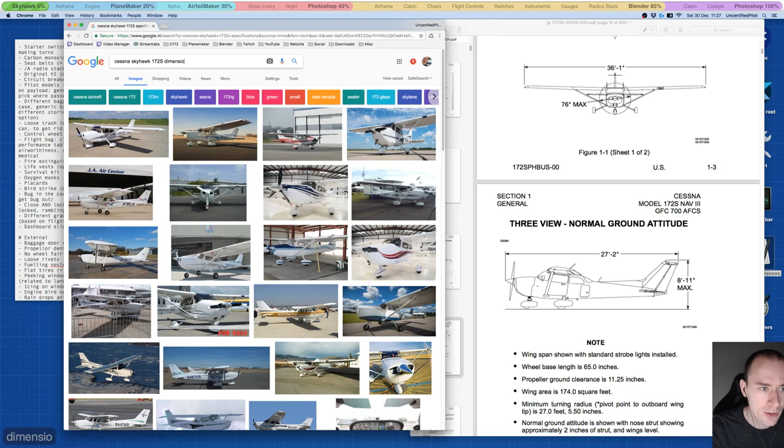For example, dimensions, right? Scale. If you look, can I zoom this stuff in? Now look at the front view here. Do you see what I'm referring to? If you look at the windshield here, this seems much more realistic to me and much taller than this.

Even though this is in the manual, and I need to be sure about the pictures and that they are to scale. So my first question would be, what picture is right? Should I use this one or that one? And I would expect that in the manual here that this would be correct, but it seems too cramped in my eye, and that's what triggered me to look for some additional specs.

Hey Lex, good to see you. Good morning.

So what do you guys think? What's the proper one?

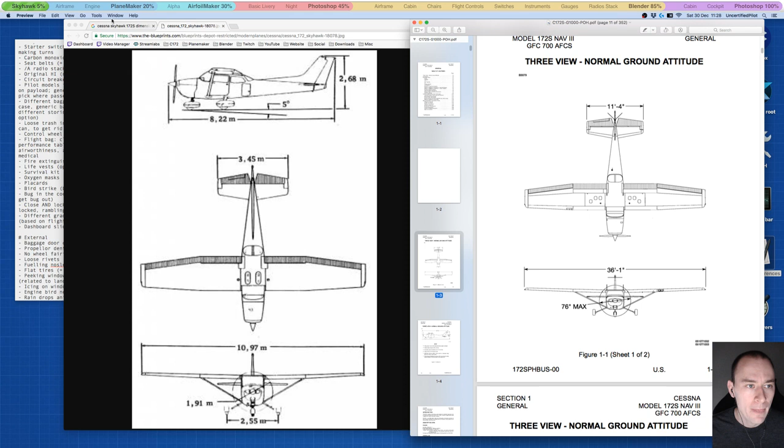Yeah, this is a better resolution. This is 782. Yeah, so let's save this one as well. We could work with this too. Desktop is fine.

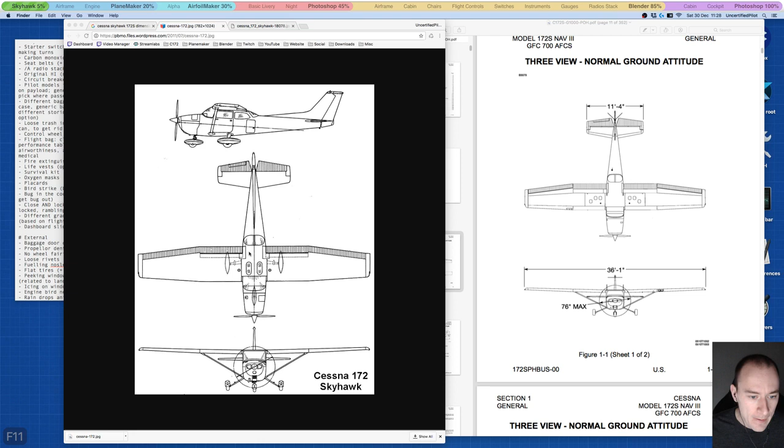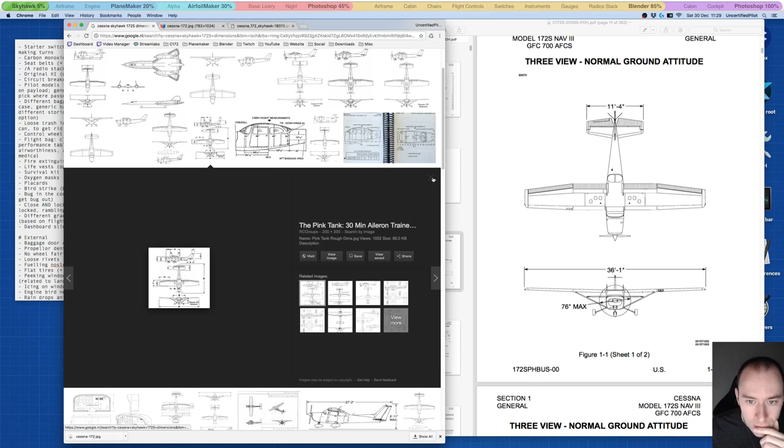References, references, thank you. Yeah, just a few more. I want to have big ones. Size large. No. Well, I already have one, I guess.

Valley, if you have an official manual, then I go for the specs on that. Yeah, I agree. But still, it looks weird. It looks too narrow, the windshield. But I would agree as well.

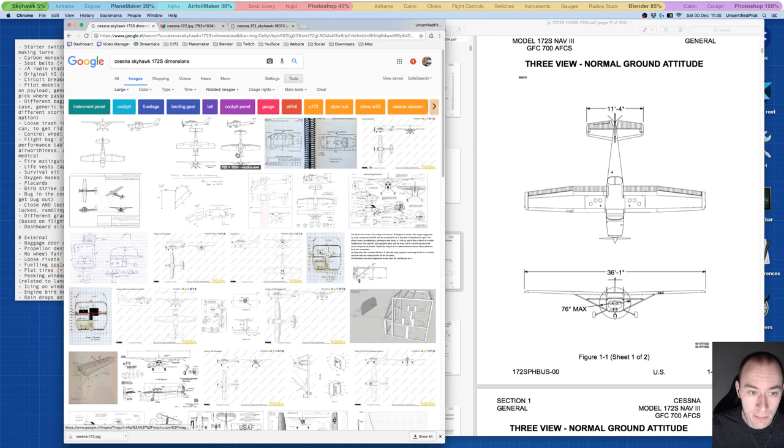This is the manual and this is the 172S. Perhaps that makes a difference, that the pictures we're looking at here is not the S version, but the R version or whatever version, and there's a significant difference in windshield. We should also look at, well, that's also a good one. Just some real world pictures of the 172S front view, and then we can compare.

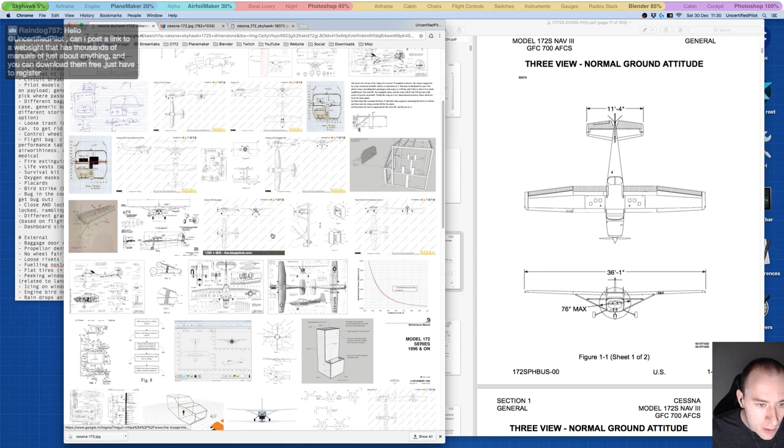Yeah, exactly. Just one more. If we can find one. I guess not.

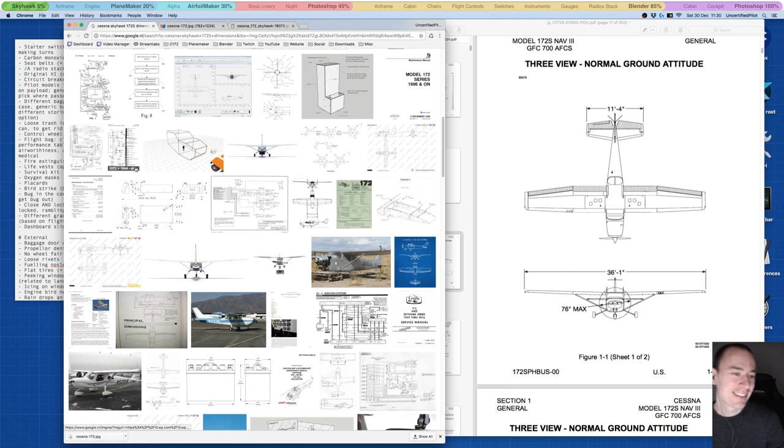These charts are so cool. Ooh. Ooh. That's nice, look at that. I'm gonna save this one. Yeah.

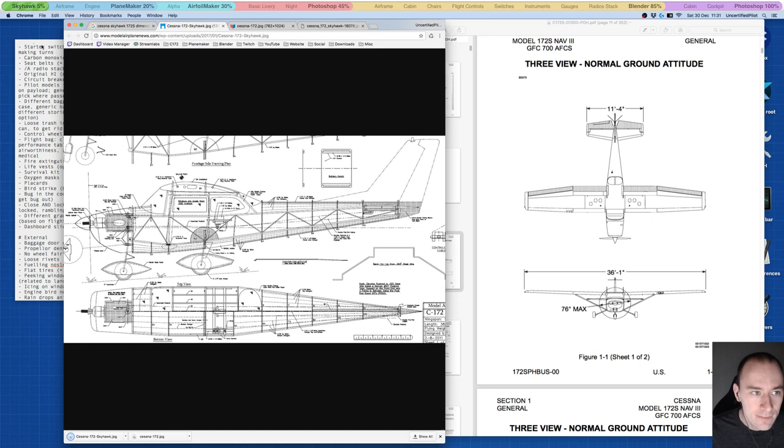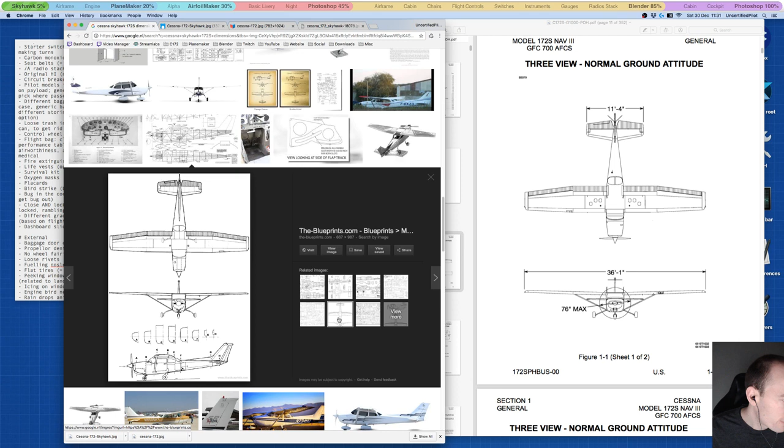Lex, if you Google blueprint, you get a lot of pictures that are the same as the manual one. Ah, good one, Lex, I will in just a sec. Thanks. Ooh, this is nice. Not the one that I was looking for, but it's nice. S version, I guess. I don't know, what's this? I'm gonna save it all, guys.

Also, in terms of the airfoil, although this one looks a little bit more dated, a dated model. But also with Airfoil Maker, we need to make sure that the airfoils are right, and perhaps we can use this one, but it seems very old. I'm still gonna save it.

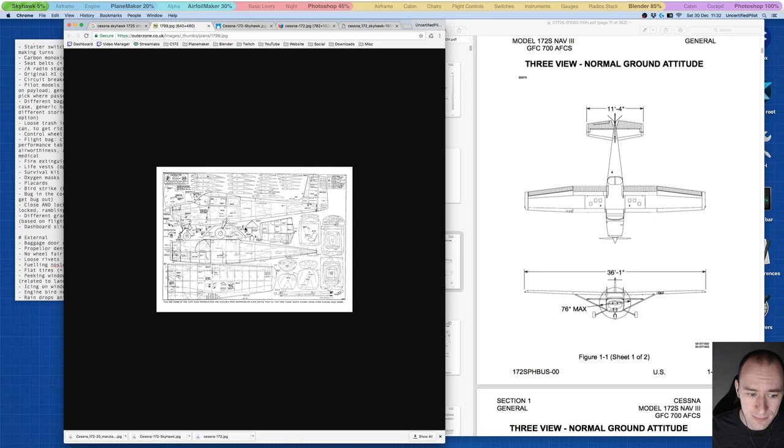Okay, let's follow up Lex's suggestion. Skyhawk S blueprints. Blueprints, yeah, so this is the one. Yeah, S. Well, this looks like the same shape as this one. And it reminds me... oh no, it's this one that I used for my wallpaper.

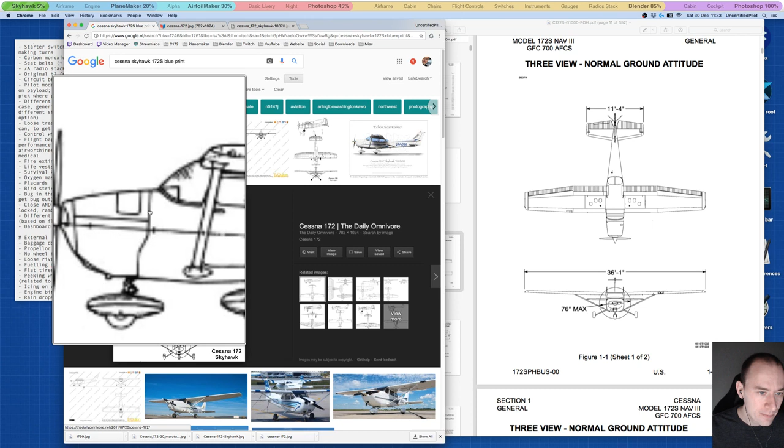Yeah, so here you can see the tall one. But if you look at it just logically, you see that this is the nose. Let me see, can I... You can see the windshield almost takes up a third of the height of, well, the top of your ceiling to the bottom of the engine, of the fuselage. A third or so. And if you look at this picture at the side, well, it does. It does, if you look at it sideways.

Well, if it's in gold, you must trust it, right? Same here.

Okay, so my feeling would be that this is correct. But another way by which we can confirm that, I guess, is just to look up a real Cessna Skyhawk 172S front view. A real front view.

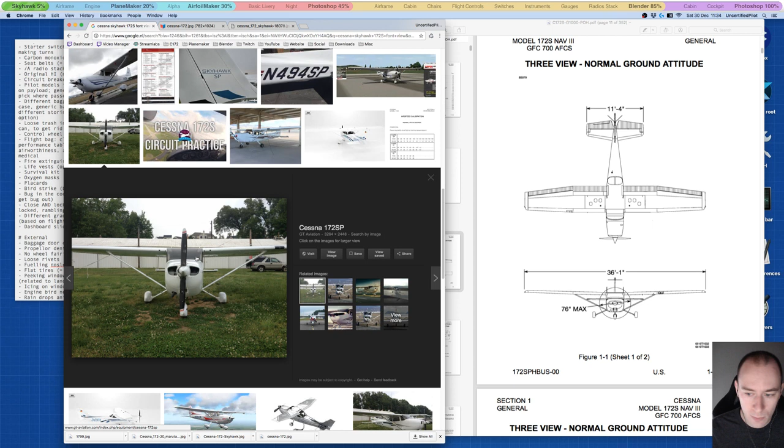For example, this one. SP, yes. Yeah, guys, hard one. I think if you look at these measures, this one is much more taller than this one.

This one looks much more like the other picture. There it is. Where is it? This one is better.

Which is weird, because this is the manual. Yeah, digital, but let me just... Are these distortions that we might see - if they are distortions - might be because they used this picture as the baseline scaling, and from that worked on... Oh, it should be the same. It should be the same.

172S. We need to look up a maintenance manual, guys, of the 172S, a maintenance manual. This is just the ordinary POH, but a maintenance manual is for the engineers and stuff, and perhaps there's a more detailed, more authentic front view of the Skyhawk.

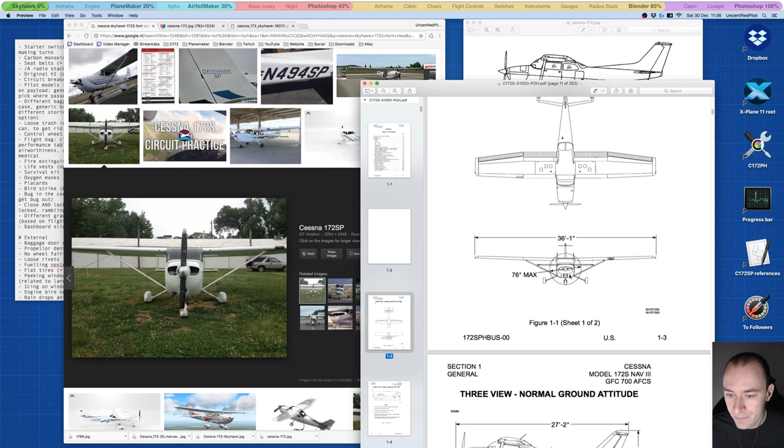But this is important stuff, because if I load this into PlaneMaker and I make this one, then we might find that it's actually not the right proportions of the Skyhawk, and I need to do all this stuff all over again, which I'm not planning to. So that's why I need to make very sure that these pictures are right. And if I look at this picture of the 172SP, the real one, you can see it's much more taller than this one. So I would say this is not correct, even though it's in the manual.